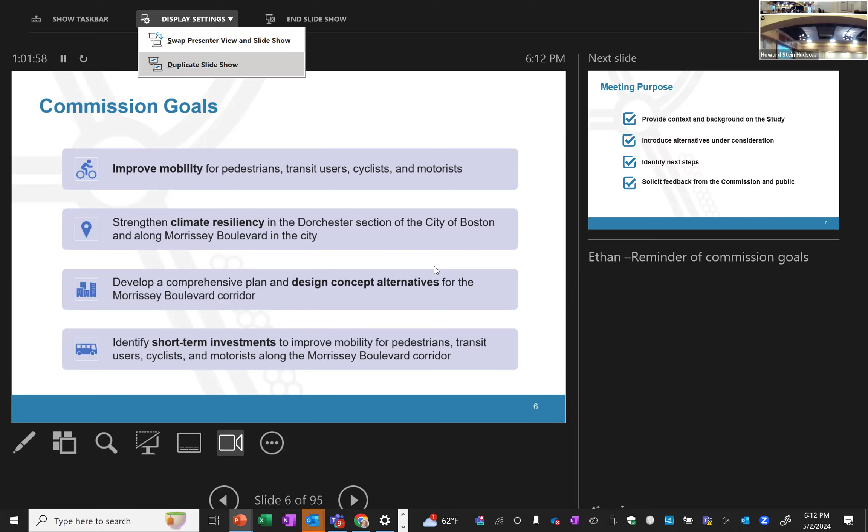Meeting purpose: we're here tonight to provide a little context and background of the study, and we're going to introduce alternatives for consideration. We want to show you our alternatives development to date, so we can hear feedback from the public as well as commission members. We're going to identify our next steps to the board commission meeting, and we want to solicit feedback from both commission members as well as the public. Just as a side note, there is a sign-in sheet outside the door if you would like to speak afterwards and ask questions. There's a microphone there in the center.

Bear with me on the presentation, it's slow. Deck advances. No, it's not.

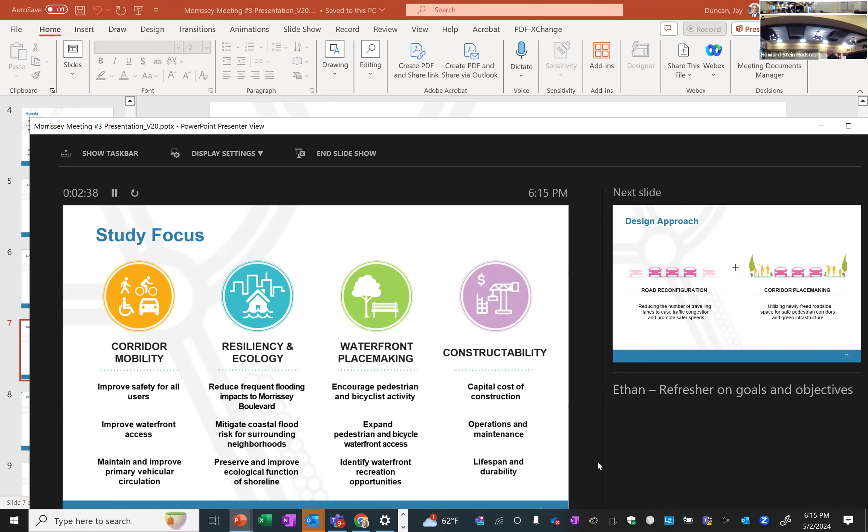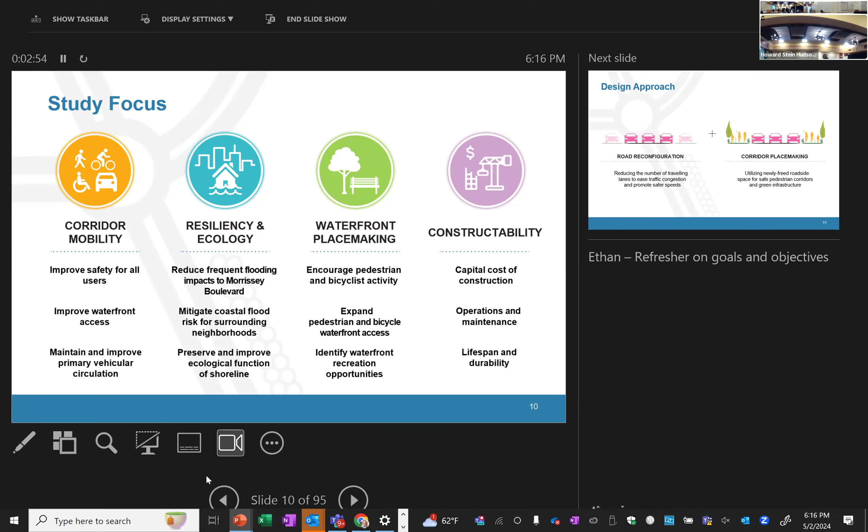Placemaking is not just about making the area resilient, but also a place to go to and to live in, with ability and constructability in mind. We don't want to propose things that can't be constructed, so we look at things like costing, operations and maintenance, as well as lifespan.

This slide focuses on our design approach. When you look at this graphic, it shows the current state on the left side with vehicles, and the right side with vehicles as well as other modes. That's what we're really trying to focus on, moving from what it looks like now to what it looks like on the right side.

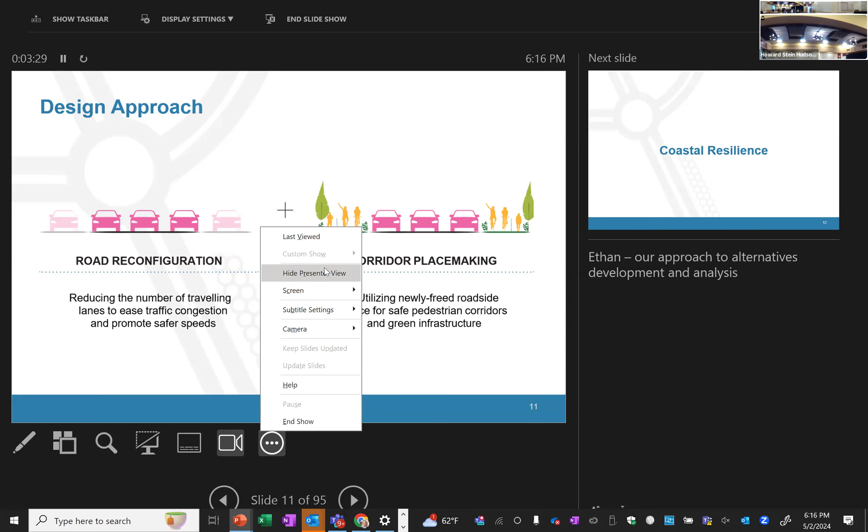In addition to our road reconfiguration, we are obviously focusing on coastal resilience. This is a slide we showed in the prior presentation, meant to illustrate the areas that are protected and the areas that are unprotected.

We've already covered this, so what I'll speak to is that the northern portion of our study area has a lot of protection, as does the southern area. It's the central zone that we're going to be focused on for climate resiliency.

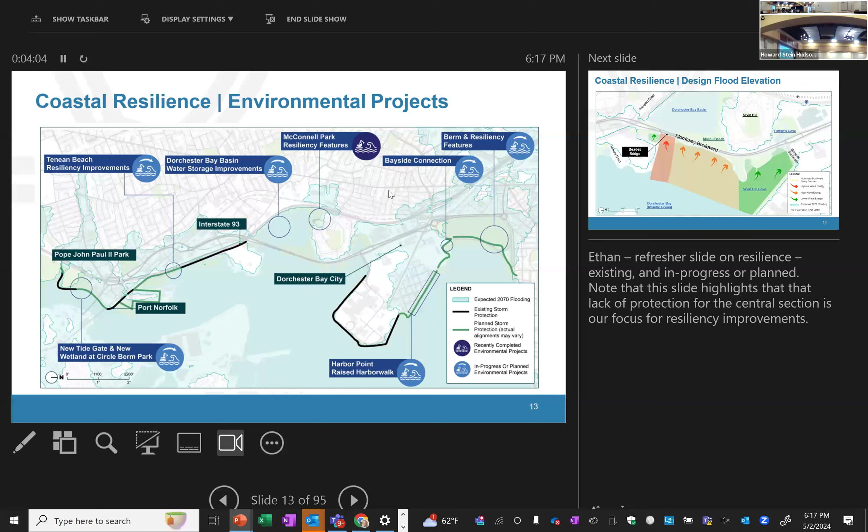This graphic illustrates a bit more wave action and introduces a term called design flood elevation—essentially what we'd have to bring the roadway, or areas that aren't roadway, up to for protection.

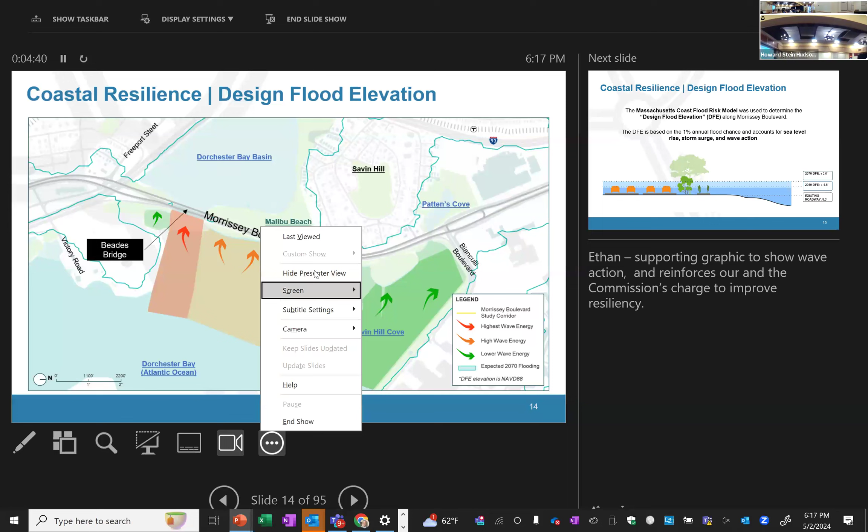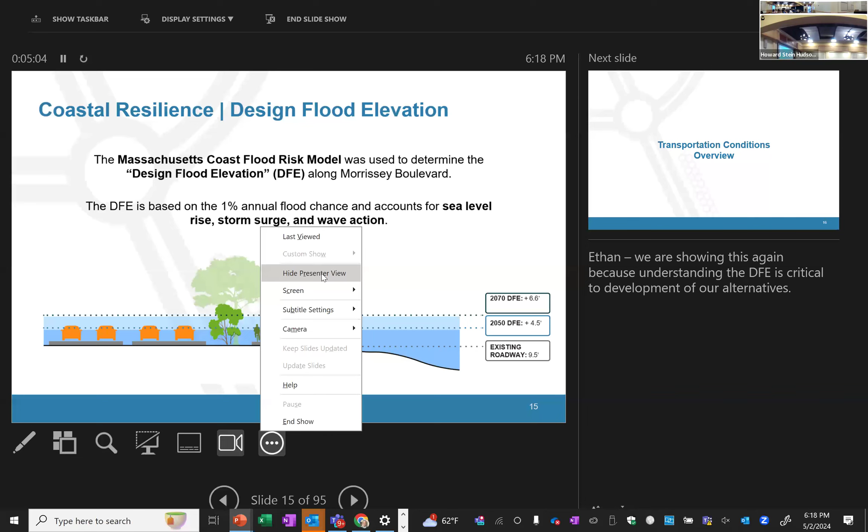This graphic is more of a side view of what the design flood elevation needs to be. We have our existing roadway and then the year 2050 design flood elevation. We showed this in a different way last time. Here we're showing our existing roadway at 9.5 feet, and we'd have to add 4.5 feet for 2050. For 2070, we'd have to go up another 6.6 feet above that. This illustrates what we'd have to raise the road area to in order to prevent flooding.

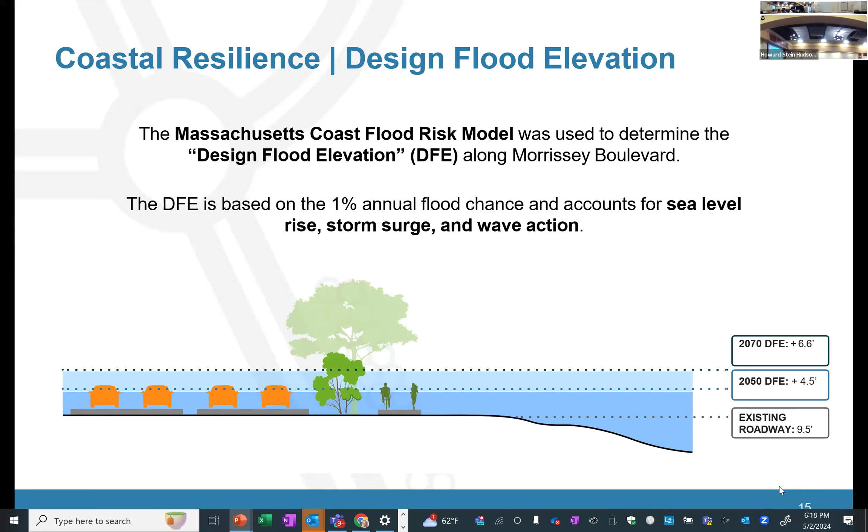So I'm going to turn it over to Casey, part of the team, who is going to go through much of the technical work. You've heard a lot from me the past couple of evenings, so I'm sure you'll be happy to hear from somebody else.

Good evening everyone, my name is Casey Harden. I'm a transportation engineer with AECOM, a consultant working on the project. I'm going to talk a little bit about some of the background on transportation conditions and explain how we set the footprint for what we're trying to do with specific alternatives.

I think a lot of you know from your route here that the traffic started. So we're going to start with traffic—I heard quite a few people muttering on their way in. I got stuck at all those red dots too, right?

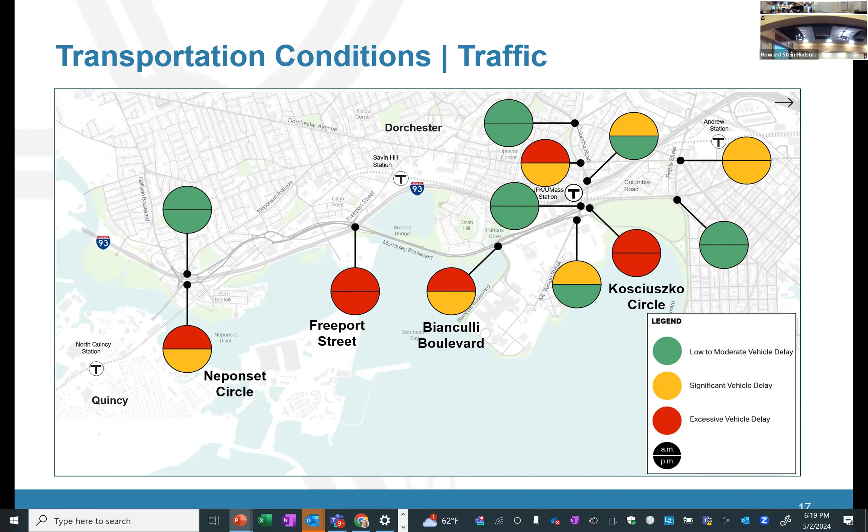The Morrissey corridor is really constrained by bottleneck intersections at K Circle, Freeport, and Bianculli Boulevard. The intersections themselves can't process the demand trying to get through there. So when you think about Morrissey as a 3 or 4 lane roadway, during the peak hour, for the most part those lanes are just storing parked cars that creep at 5 miles an hour from stop to stop. I wanted to set that as the backdrop, also thinking about the use of the corridor.

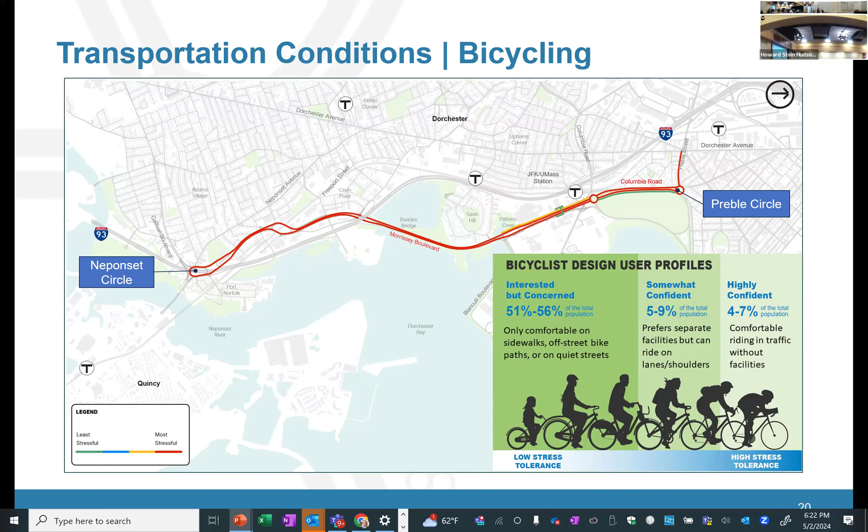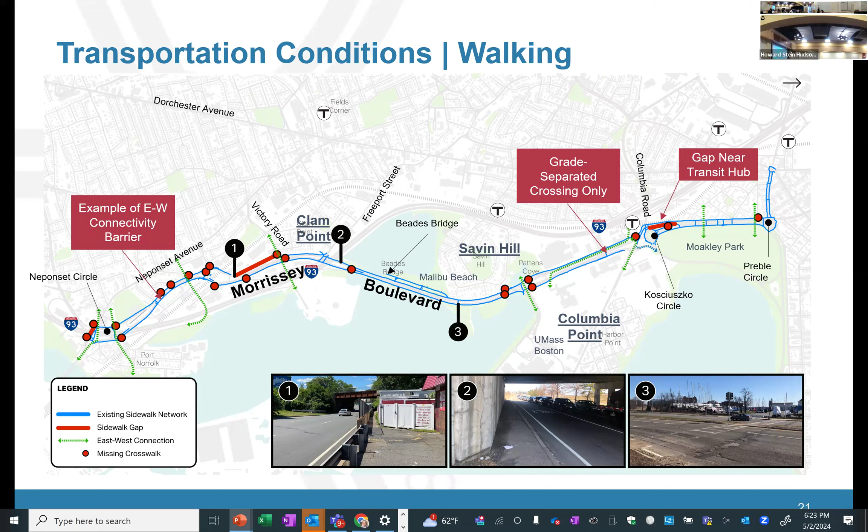With that kind of background for transportation, as even suggested on the climate resiliency side, we're going to go through the corridor and highlight some of the potential alternatives that we're looking at. We're about midway, three-quarters of the way through this commission process, so we can give you the opportunity to see them and give us some feedback, so that we can come back to the drawing board as we advance towards the final recommendation.

To go through this process, we're going to break the corridor up into three big chunks, starting in the north, where the focus is on reconfiguring the roadway facility, but also looking at placemaking and green infrastructure. The focus in that central section is very definitively on coastal resiliency, but also looking at how to better configure the roadway, and then back to more of a transportation focus in the southern part of the corridor.

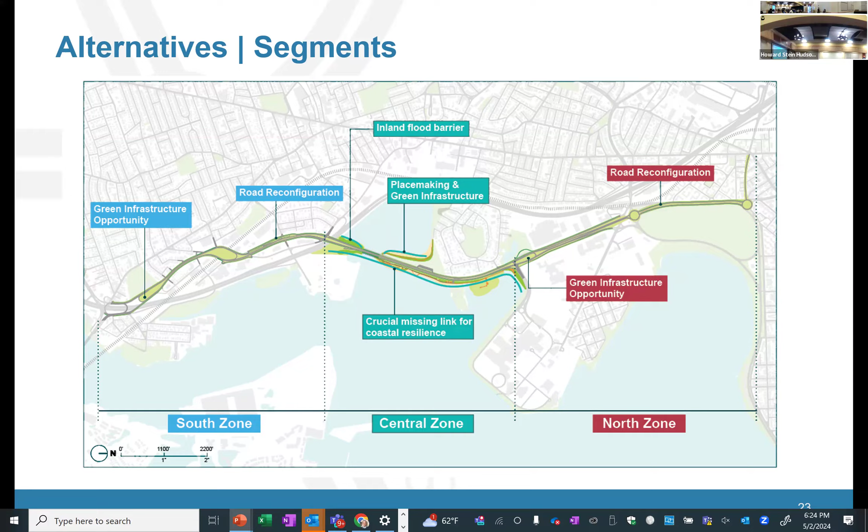Now, when you think about that and you're starting to get a little scared, I just want to remind you of that point at the beginning. When we think about the way traffic operations go poorly, it's because of these few intersections — there's too much trying to get through one spot. So I'm going to talk about, as we go through the corridor, how we're working on some engineering solutions to help those intersections work, despite allocating the space better to bicyclists.

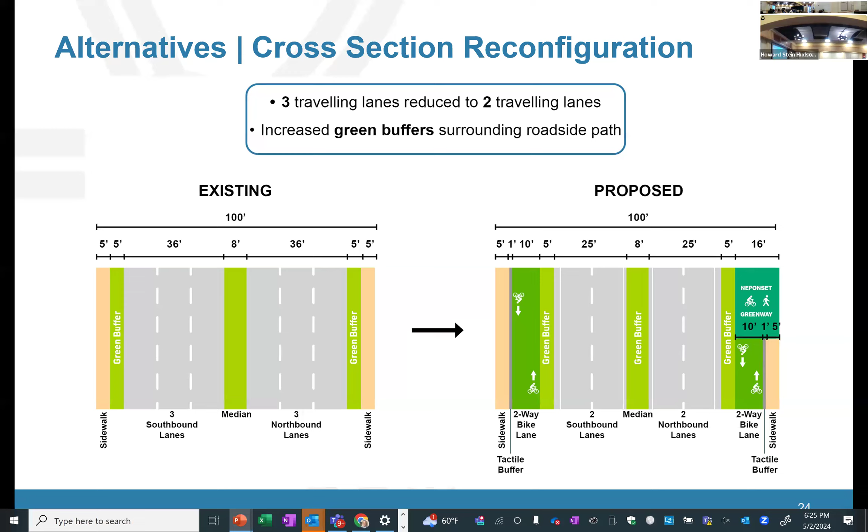To do that, we started with some traditional traffic control mechanisms — traffic signals, pretty basic, roundabouts, those are pretty standard. But we're also looking at some relatively progressive intersections that are all designed to remove turning vehicles or move them out of the way. That allows the intersection to focus on processing fewer movements. It can get more cars through while also consolidating the space to help manage speeds and find ways to redirect and relocate those movements. I'll show you as we go through the corridor how that would work.

As we focus on the northern part of the corridor, we've looked at a couple different ways we might reconfigure Preble Circle. On that first diagram with the safety drawing, we noted Preble Circle is one of those locations flagged as a high crash location. It's very confusing, although some recent striping improvements have gone a good way to better delineate traffic.

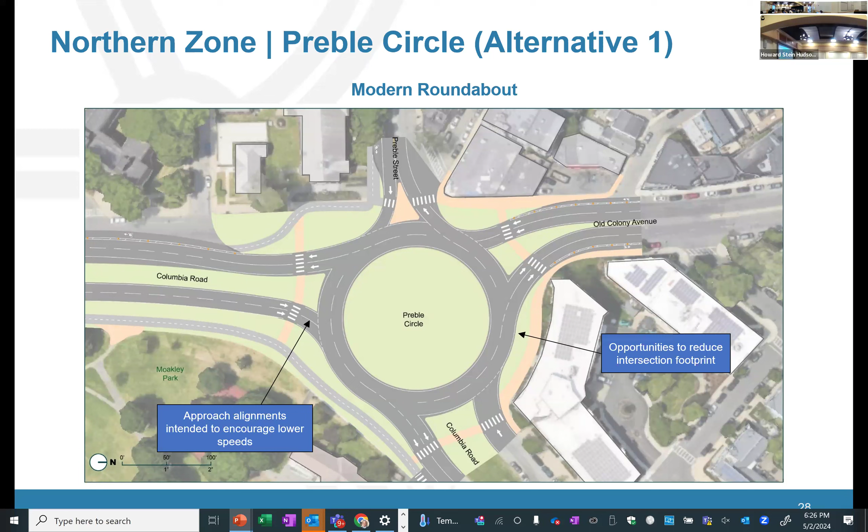The other option would actually look at creating a traditional traffic signal. That would be a big change. We're accounting for the fact that it could potentially process traffic, but also understanding it would be a big change that needs to be vetted. It would likely have wider approaches than the roundabout, but we're still working through that traffic analysis, and by our next and final meeting we'll share results on which of these performs better.

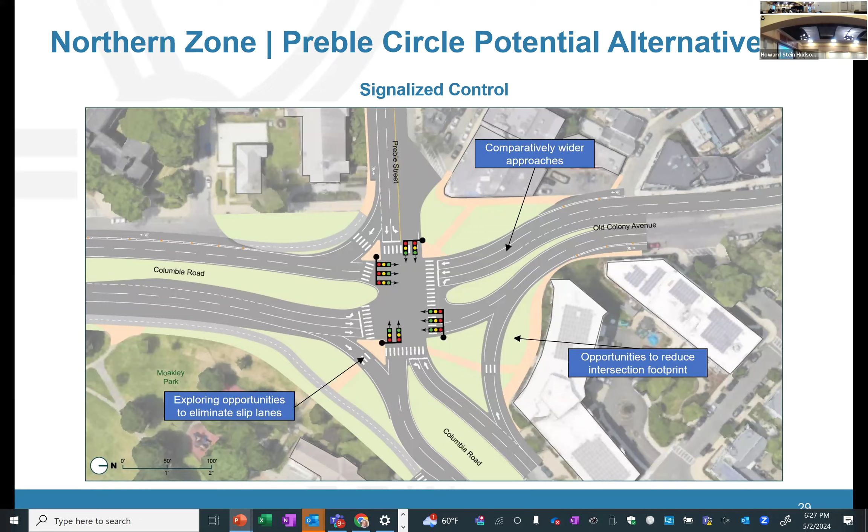As we move further south along Columbia Road to K Circle, we focus on potential east-west connectivity. Right now there are several at-grade pedestrian crossings, and there's also a pedestrian bridge. From an urban design perspective, the latest practice is to encourage that activity in the street, because when you limit crossings purely to up and over, it creates this divide: this is for the cars, this is for the people.

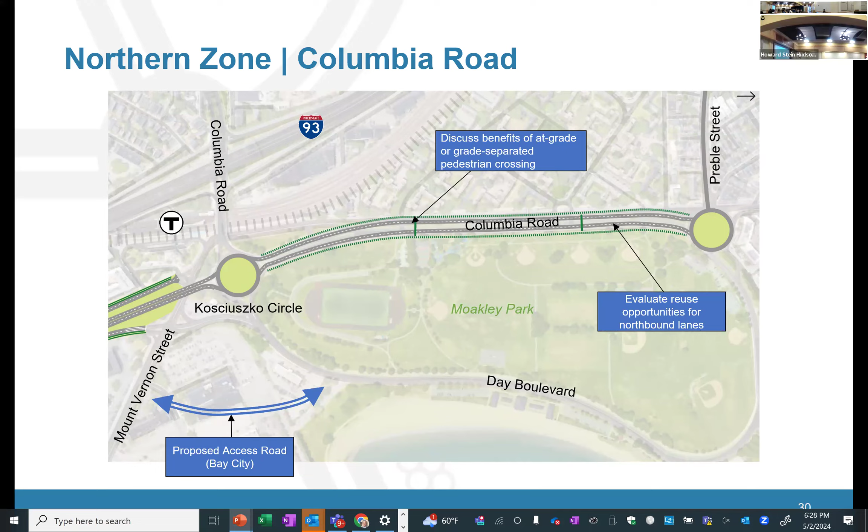Looking north now, up towards Preble Circle and downtown in the distance, with Moakley Park to our right, one initial alternative we've looked at is simply reconfiguring the crosswalks at the local road intersections, and converting the bicycle lane—currently on the road side of the parking—into a parking-protected bike lane, putting it off on the right side of where the cars are.

We have a second alternative that takes us even a step further. This looks at potentially removing the median and providing bus lanes. We've collaborated with our friends at the city, and through their work, thinking about how, with significant developments coming in from the point, we want to ensure multimodal access—potentially having a dedicated bus facility on this segment could help facilitate that.

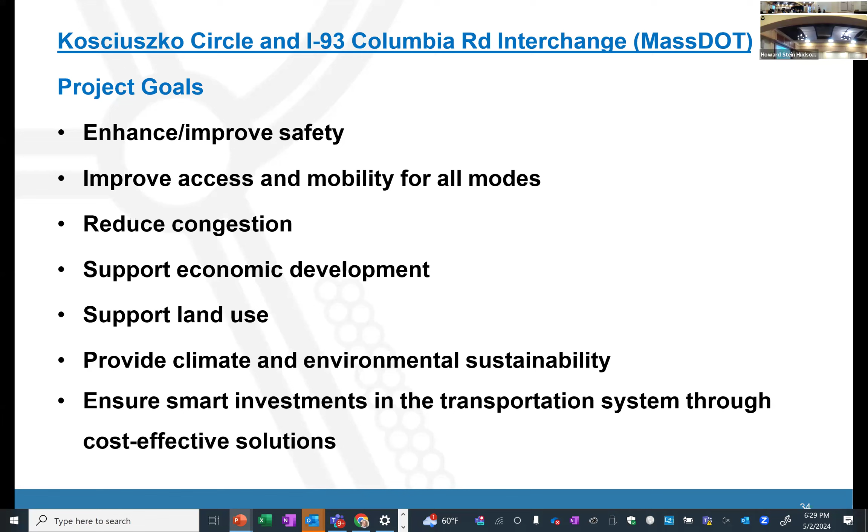Now, as we get towards the Kosciuszko Circle intersection, we need to explain there's a separate project broken out for Kosciuszko Circle and the I-93 Columbia Road interchange. That project is advancing on its own through coordination with us. It has a lot of the same goals and objectives, aimed at reducing congestion and improving safety. Looking at the study area, it comes right in between the segment we were just discussing, but also looks at where Columbia Road bends around—these are the interchange ramps.

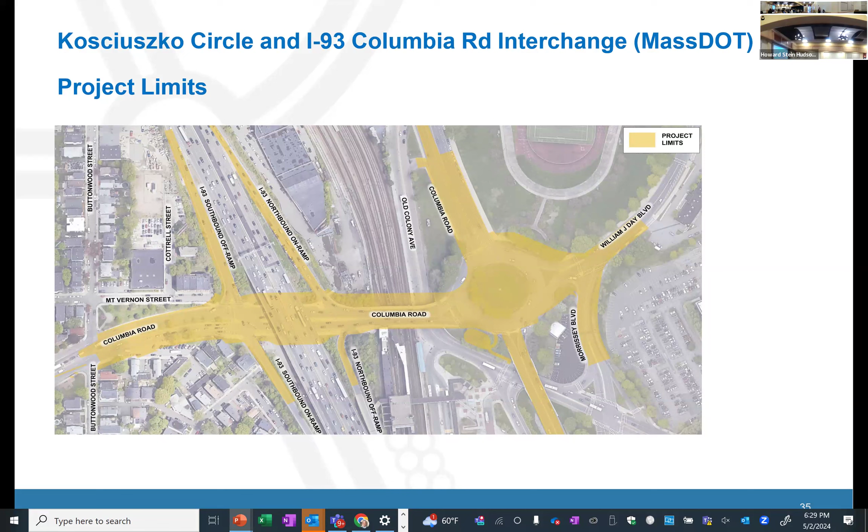It's a very early stage. They're still working on their scoping and planning out their public engagement process. I think the key point here is they're going to be looking at a variety of different options with a design year of 2045, which lines up with our future year traffic analysis.

So what—the design year? That's when we project the traffic out to a future year to analyze what the road traffic volumes could be.

So this is new? This project has actually been presented about 10 to 13 years ago, with lots of meetings from the community, going through Kosciuszko Circle all the way down. All of this has been presented with all these different ebbs and flows with the growth of the company. How does your presentation compare to what the city has already spent lots of money teaching us all this? This is not new to the community at all, and now we have 10 years of data of traffic and flow from that. So what is the difference? Because this is the exact same thing, except more basic than where we progressed to 10 years ago—on the exact same stretch, minus the environmental planning portion.

So please don't waste our time, let's talk about the differences and what's evolved in the last 10 years from the exact same thing. These plans were presented to us almost 15 years ago. Maybe someone from the city could address that lack of progress, because that's a waste of our money and time, discussing the exact same thing. I can show you my notes, but I'm sure you have them since they've been documented. Sorry for my frustration.

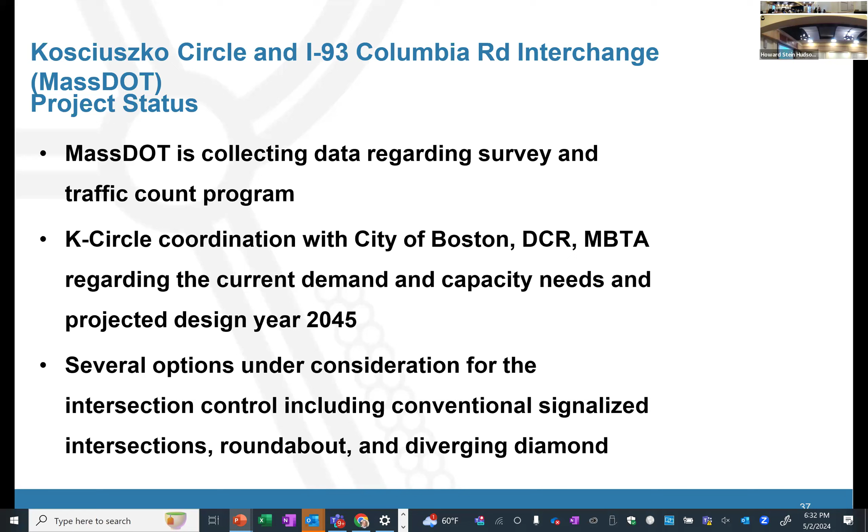Hold on for a second, can we just get through the presentation so we can address everyone's questions at the same time? I want to make sure we're not getting ahead of ourselves. You might find your questions answered as we go through this. I understand your frustration, but we also want to make sure those who weren't here during previous meetings have the opportunity to access the same information. So if we could just hold off until you finish this. Thank you, I appreciate it.

Thank you. For that specific project, the K Circle Columbia Road interchange, MassDOT plans on targeting late 2024 with some additional specific public outreach.

If we look further south and focus on this segment right outside us here at BC High, we're looking at whether there's really a need for those service roads. They take up a lot of space, continue to facilitate high-speed mobility, and impede the corridor from being a good access point to the station.

We're also looking at something thought up in the Columbia Point Master Plan many years ago: putting a signalized intersection in the middle of the block between K Circle and Bianculli.

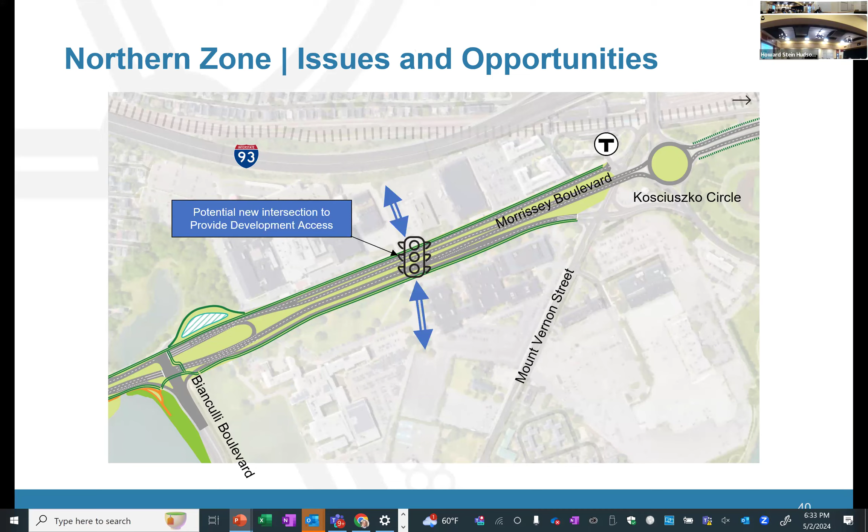We're now looking south towards Bianculli, from here to the left. The first option is a relatively simple reduction in the number of lanes, providing for bicyclist and pedestrian facilities. The second alternative provides a signalized intersection and brings all four roadways together. The final alternative doesn't have that signalized intersection, but eliminates the frontage roads—you can see how that creates additional opportunity for green space.

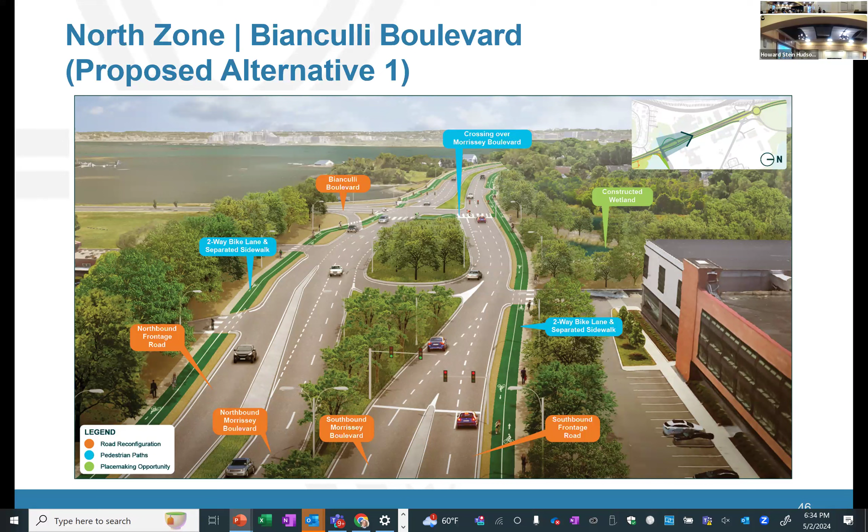At Bianculli itself, we've looked at two potential innovative intersections. The first is called a continuous green T. This works by allowing one movement, the southbound movement, to flow green at all times. That creates a really efficient intersection because it never has to stop those cars, and it allows us to neck the intersection down to facilitate smaller crossing distances—we like that from this perspective.

The other alternative we're looking at for Bianculli is called a partial median turn. Instead of drivers today swooping off to the right to make their left into Bianculli, they would continue straight and utilize a new intersection down here to turn left, then make their right. The theory is we're moving some of those turning movements out of the intersection—either allowing throughs to go all the time without stopping them, or moving lefts out of the intersection altogether. That lets us consolidate and help the intersection operate, and the cross sections illustrate that reduction in size.

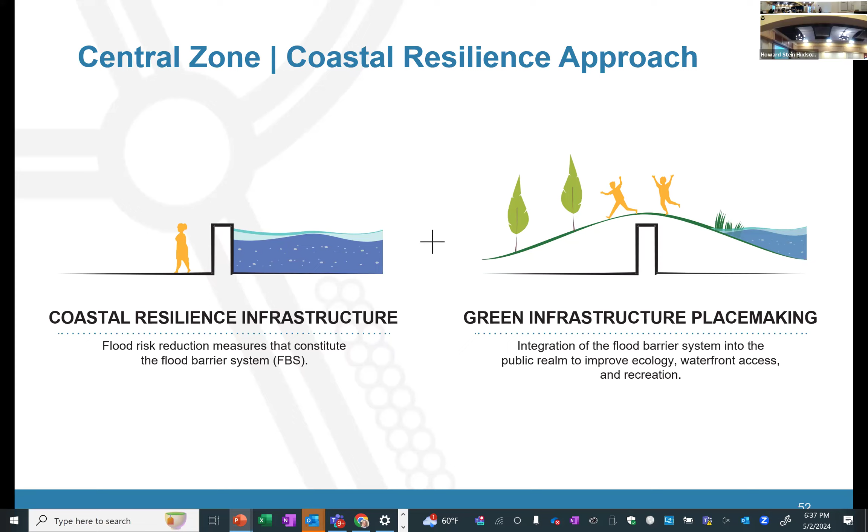But how do we do that? We don't do these things the way we used to back in the 60s and 50s, where the Army Corps of Engineers would just come in, install walls, and prevent floodwaters from coming in. The investments we're conceptualizing leverage green infrastructure and placemaking while introducing these flood protection mechanisms. The diagram on the left shows it raw, which is something we will not be doing. What we'll be doing is combining the road infrastructure with placemaking opportunities, and I'll show you what they might look like.

Generally speaking, Casey was telling us everything happening in the north, and he'll tell you more about what's happening in the south. This is about the central area, where we believe there's the most opportunity for pedestrians and placemaking to occur. Now, I don't want to dismiss the north and south with respect to placemaking opportunities.

Everywhere we can, in every alternative we study, we're introducing green infrastructure, pedestrian mobility, bicycle connectivity, and rights of way that allow families to walk along the water safely, connecting you from the north to the south.

But when you get to the center, you get this amazing view to the harbor, to Dorchester Bay. There's an accessible waterfront that I think is an incredible opportunity for gatherings. That's what's shown in this diagram.

If you squint because of the scale of the project, you can actually see right through the center—there are a lot of green areas for programming opportunity. What we do with that is basically imagine the road being raised, and on the side facing the water, a berm-like structure that introduces a boardwalk, places for people to hang out, chill, find shade, and a lot of opportunities for ecological and habitat restoration. We'll show you what that means in the next slide.

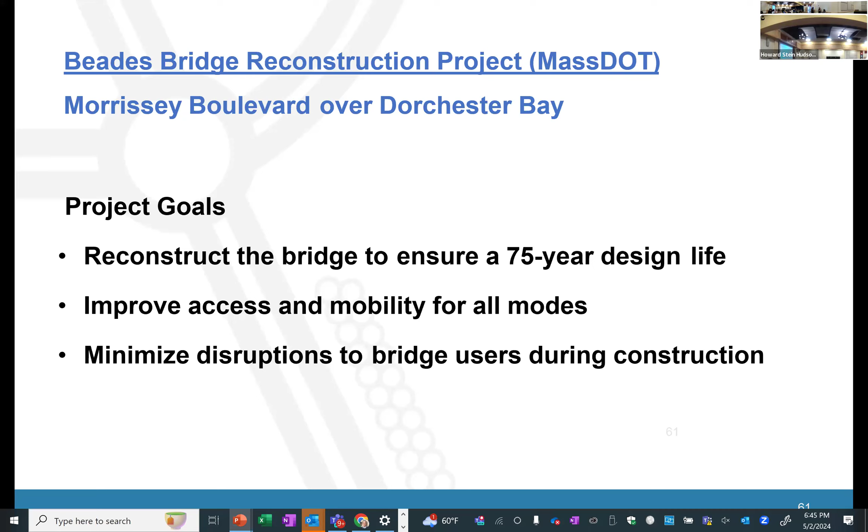Back again to talk a little bit about the Beades Bridge project, which is a second breakout project that MassDOT has initiated to advance the replacement of the Beades Bridge. Everyone knows it's been here for a very long time, has many issues, and usually gets stuck open. So the new design will ensure service life for the next 75 years. Again, the Beades is just that short, simple span across the navigation channel to the cove.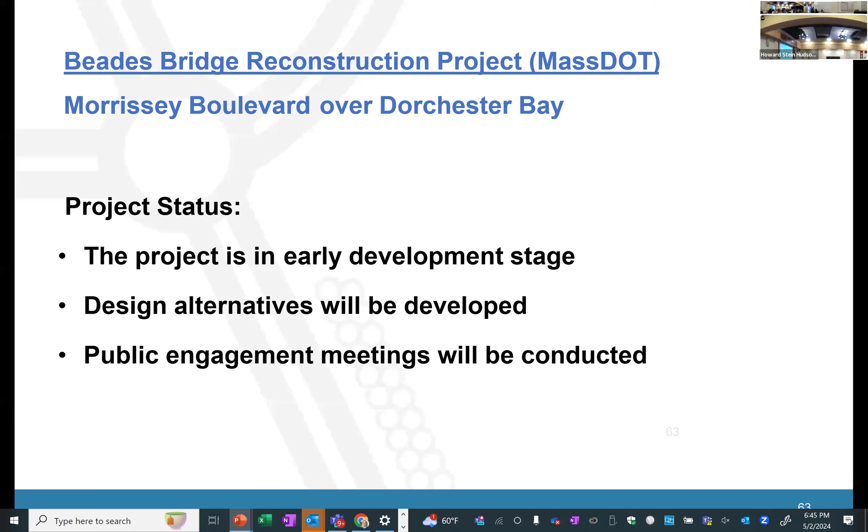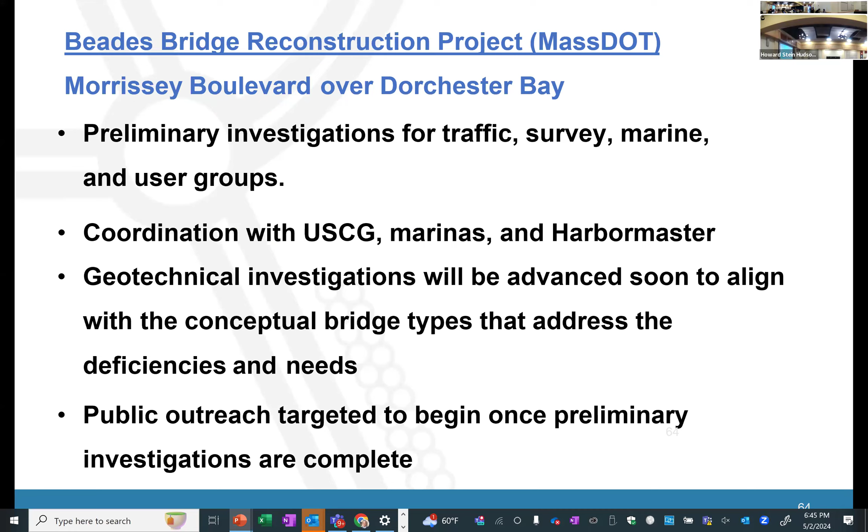Very early in development, similar to the case for Morrissey Boulevard project, continuing coordination. The main point of getting this on its own track is that all those initial phases of a bridge project are a little different from a road or flood control project. They include geotechnical work, a variety of structure type analyses that they're initiating, and they'll be conducting specific public outreach for that.

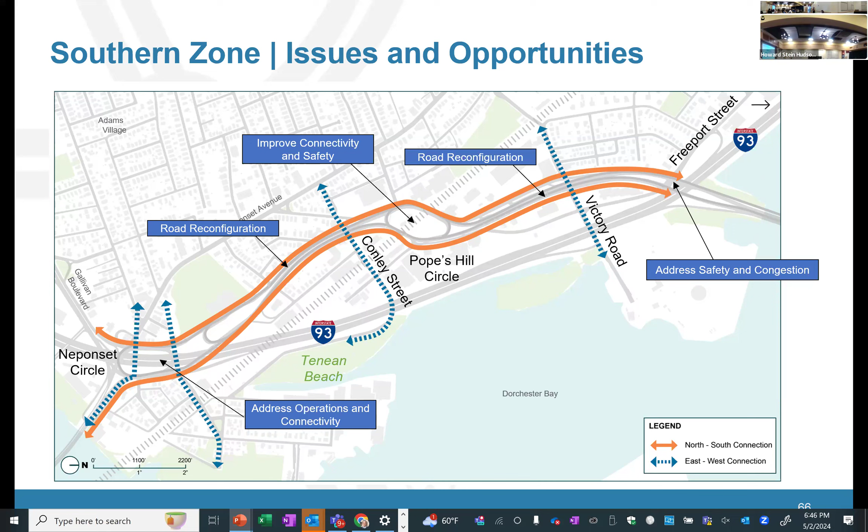As we get past the Beades towards Freeport, we enter the southern zone. Just past underneath I-93, we have some of the same types of challenges: congestion, safety issues at Freeport, important east-west connections at Victory and down Conley Street, and safety issues at Pope's Hill and Neponset, particularly for folks trying to get through there in the mornings.

Starting at Freeport, we have two potential ideas to reconfigure the intersection in a meaningful way. In this configuration, we would pull all left turning vehicles out of the intersection. You wouldn't make a northbound or southbound left directly; instead you would come through and make a U-turn to get going, with the same type of movement for your southbound left turn.

The idea is that by pulling those movements out of the intersection, we can create efficiencies that reduce the footprint, which helps with speed off peak so people aren't driving through there at 50, and also helps the intersection process the traffic and demand more efficiently.

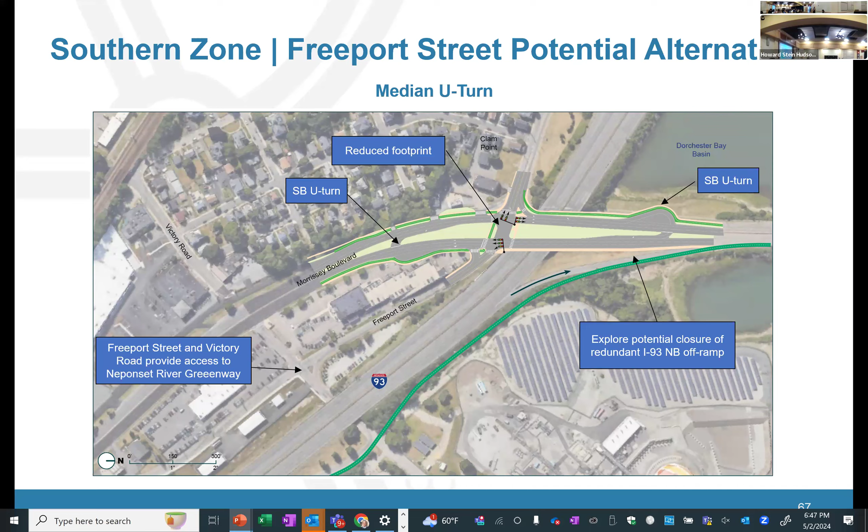The second idea at Freeport is called a quadrant roadway. This is a pretty unique application, but generally a quadrant roadway builds a little connector across one leg of the intersection. In this case, we would use that to eliminate northbound lefts. So instead of making a northbound left off Morrissey, you would make your right, down and up Victory Road. That would again pull those left turns out of the intersection and allow us to create more efficiencies for the traffic signal. We're continuing to evaluate all of these and are interested in your feedback.

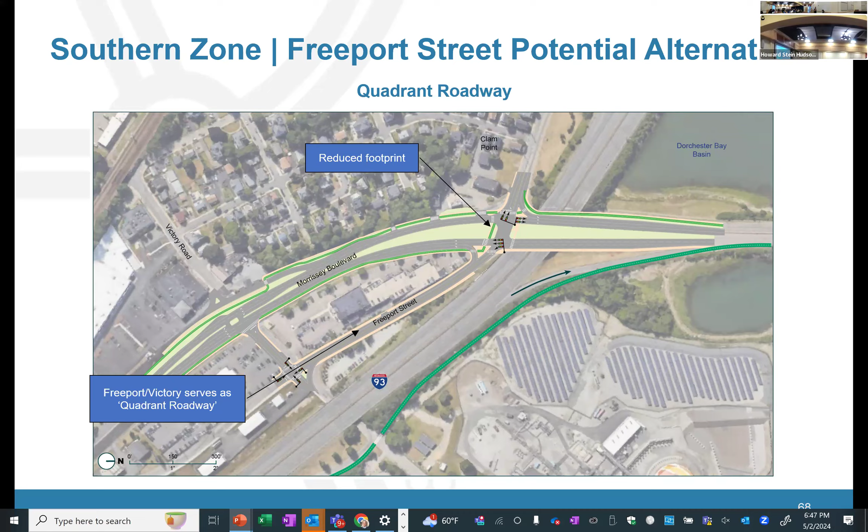Continuing south, we're again looking at that service road system in and around Victory Road. The need for that creates an additional crossing for pedestrians heading west, although it does have some access management benefits. Most importantly, at the northern part we need to ensure connectivity with the Neponset River Greenway.

Excited to see some of the construction progress, and recognizing there's going to be a big group from the community that wants to get from the neighborhood to the Greenway, but recognizing the ramp system, it may be more likely that we facilitate that along Freeport and Victory Road. So we're taking a closer look at that northbound off-ramp, and whether it's really fully needed in the scheme of traffic, although it's a pretty big task to get one of those.

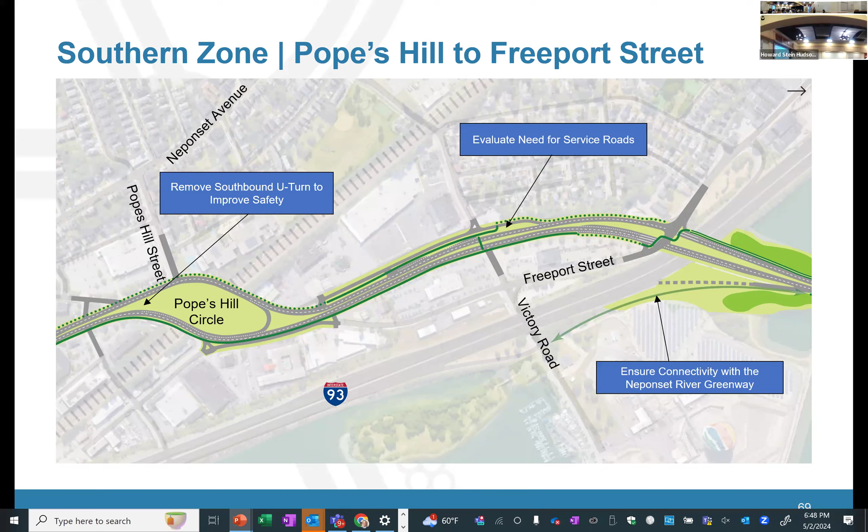For our southern road section, from Pope's Hill Circle down to Neponset Circle, we want to flag that we're looking at this southbound U-turn at Pope's Hill Circle. That's where a lot of people are coming into the neighborhood, and I know you've all done it many times, making that jog all the way over to make the U-turn - you can see a lot of crashes as a result. We're not sure that's the best idea from a safety perspective, so we've been looking to close that and route traffic down to the next southbound U-turn just before the one.

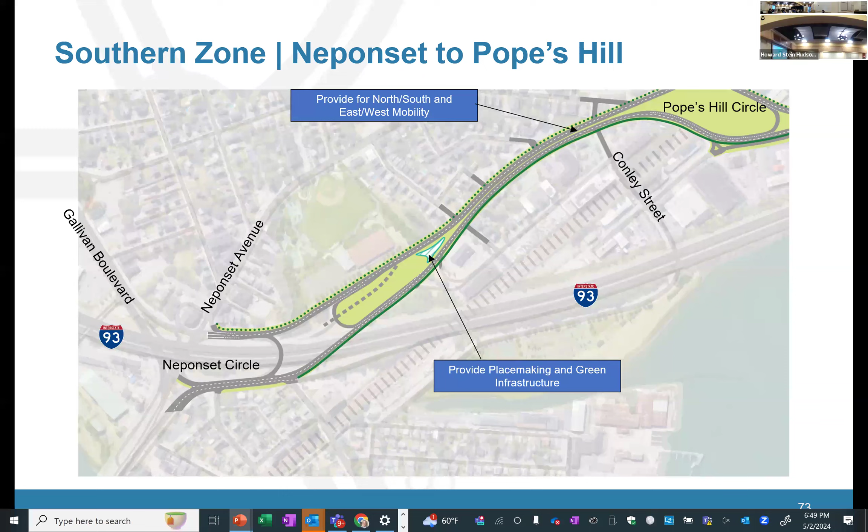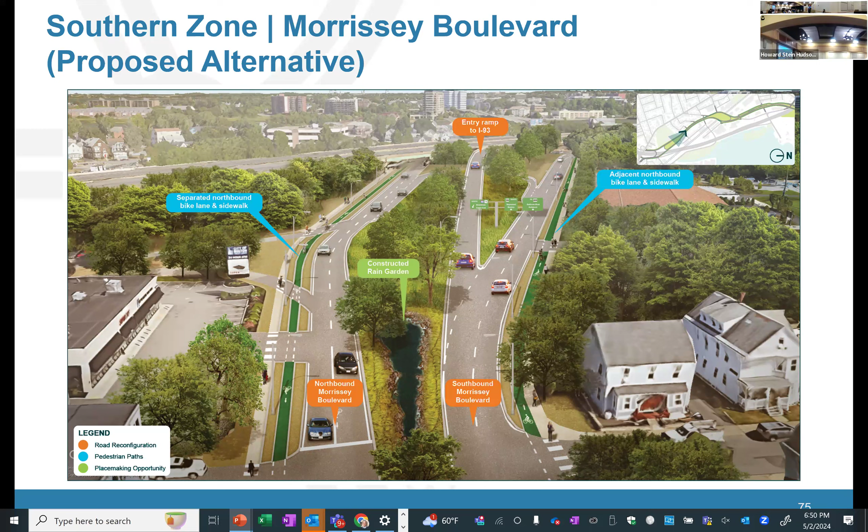We do see a nice opportunity in some of these medians. This rendering shows a typical application of how we might apply stormwater green infrastructure to some of these median areas. We were talking earlier with Boston Water and Sewer, recognizing the challenges they have draining the neighborhoods after heavy rain events - there's simply a problem getting all the water out of the city. So the more places we can find to hold and store water within and around the corridor, the better. Identifying places like this means that in heavy rainfall events they would essentially serve as a mini holding pond while the rest of the system does its work getting the water out of the city.

The last major bottleneck intersection to talk about is Neponset Circle. Just to orient everyone, north is to the left. Here's Neponset Avenue, here's the bridge - Neponset Avenue goes straight through, and Gallivan Boulevard is down here. This is the whole Neponset Circle with I-93 towering over it.

We decided we really wanted to take a hard look at this segment. This is where you folks who are going north end up stuck trying to get up, and the off-ramps back up all the way down, and you're just trying to keep going straight. Yeah, you get stuck and try to get all the way to the left and hook around.

So our idea here is to convert this segment to two-way. Today it's only one way this way. By allowing the Neponset Avenue northbound traffic to go straight through, we're taking a lot of pressure off this leg, which already is dealing with, especially in the morning peak, all these people trying to get on the northbound. So the idea is by opening that one leg up bi-directionally, people who are just going straight through, or even coming from Gallivan Boulevard, can just turn left and go that way instead of cycling all the way around in this mess of a weaving.

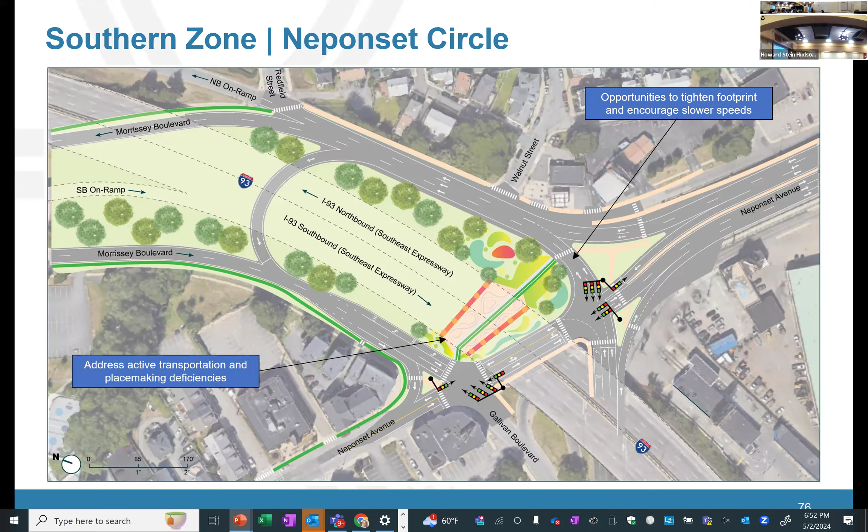Here in Neponset, within the roadway reconfiguration, we're also looking for opportunities to create better east-west connectivity. We recognize it's a pretty intimidating environment with the hulking overpasses and somewhat limited pedestrian accommodation. So we've looked at creating something like a pocket park. A lot of municipalities have successfully activated this type of space in and around overpasses, the combination of lighting, infrastructure, and nice, wide, comfortable pedestrian amenities can help create that activity that we're not seeing today.

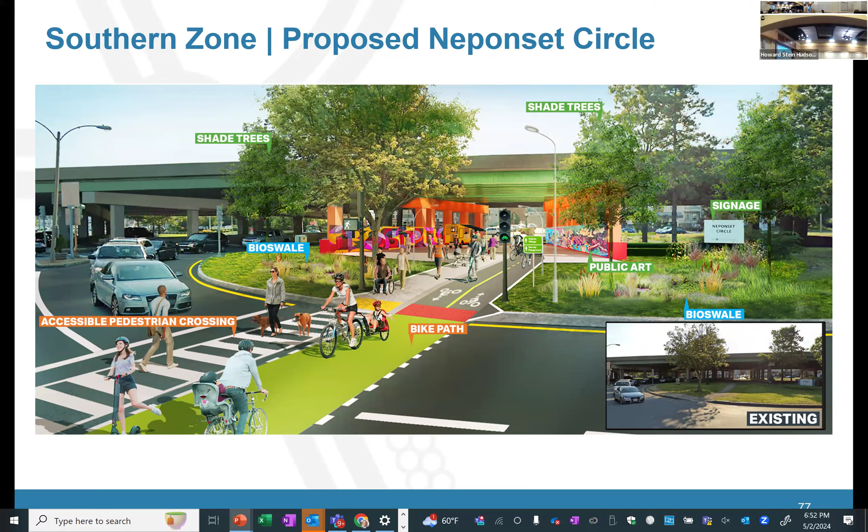So to wrap up the presentation, Ethan's going to talk a little bit about how we're going to use the evaluation criteria we developed to evaluate the alternatives.

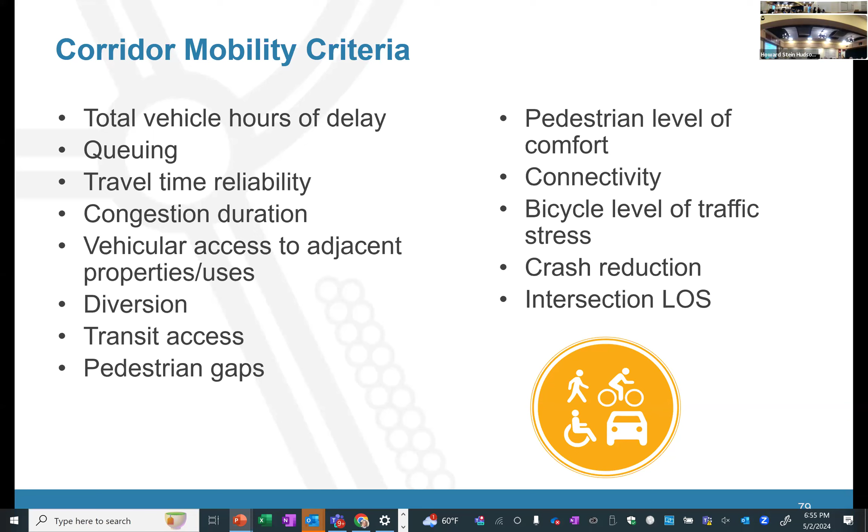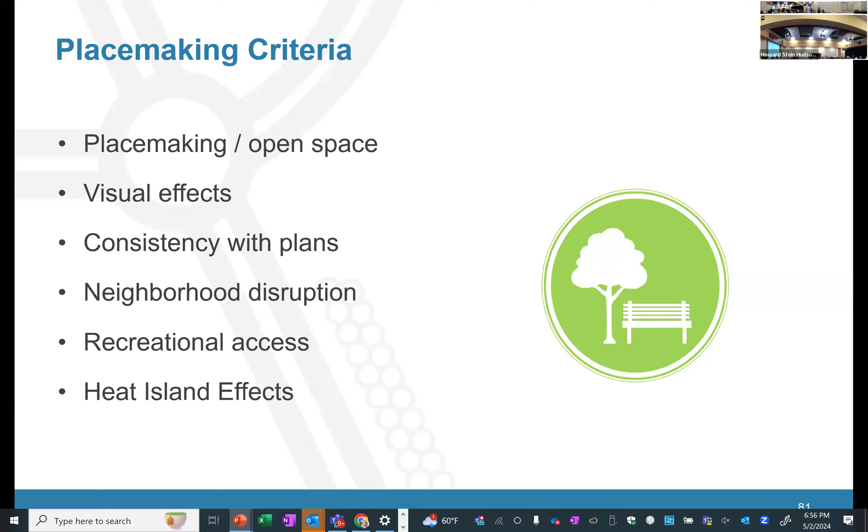Constructability is something I noted earlier, but we have to be aware of what construction costs would be. It's much more about thinking from a permitting standpoint - can it actually be done? Some people use feasibility to mean can you construct it or not, but oftentimes it's not about throwing money at it. Sometimes the permitting process just doesn't allow certain things, so we look at that very closely, because ultimately if it's not permittable, it's not constructible.

We also have to look at what kind of future maintenance there might be. We want to implement cost-effective solutions to minimize future maintenance costs, and permitting complexity is tied to constructibility.

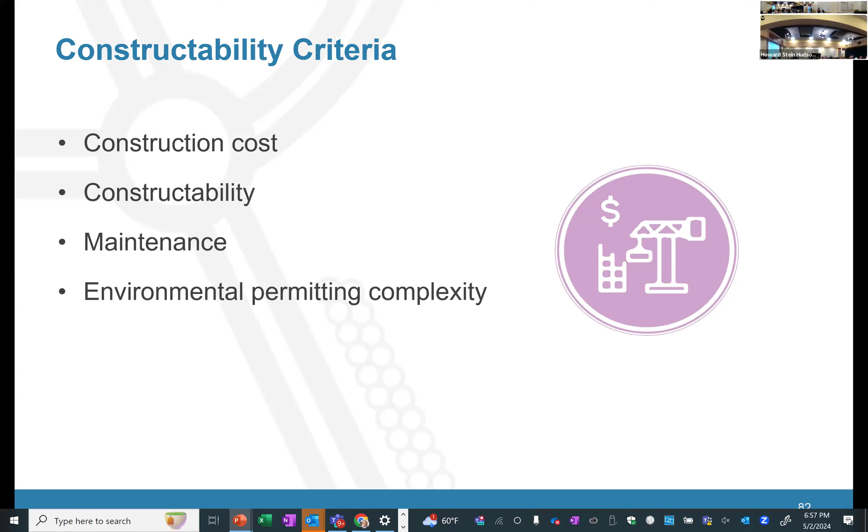With that said, I'm going to turn it over briefly to Rob Lowell from DCR, who's going to talk about some of the short-term corridor improvements. Thank you, Ethan. I'm Robert Lowell, Deputy Chief Design Engineering at the Department of Conservation and Recreation. I wanted to identify some of our short-term improvements at the Freeport Street intersection.

Improvements were completed in fall of 2023 that included safer pedestrian crossings with new signal actuators, larger bicycle and pedestrian mid-crossing refuges, and ADA accessible ramps at all the crossing points. An additional left turn lane was also added from Freeport Street to enable two-lane movement from Freeport eastbound onto Morrissey, and that was done last fall.

This spring, DCR will resurface the inner access road from Old Colony to Bianculli Boulevard and reconstruct the sidewalks along the west side, the Star Market side of Morrissey. The inner access roads from Bianculli Boulevard to Mount Vernon Street were done last fall.

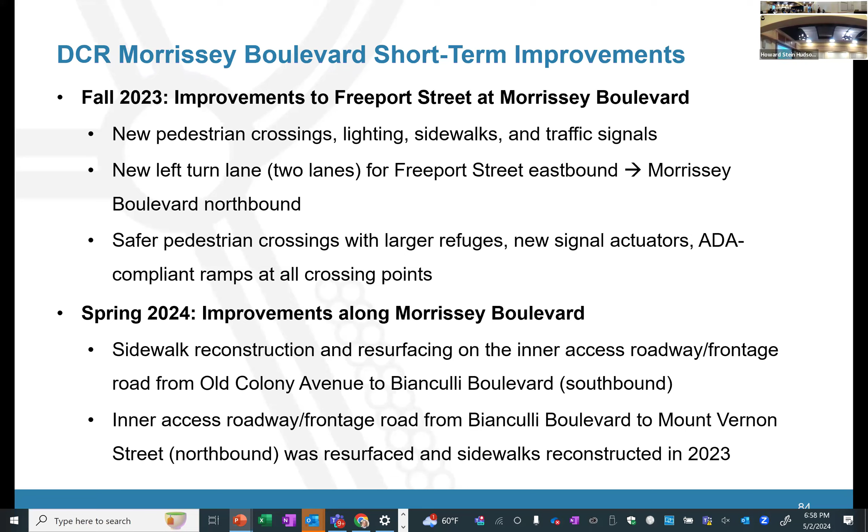Those are our roadway improvements. I also wanted to note that the Morrissey Boulevard pump station design - DCR is working on a pump station to address flooding that occurs near Conley Street and along the corridor. This started in 2019, and we're now getting to actual construction.

Presently, DCR deploys portable pumps to address nuisance flooding along Morrissey Boulevard. However, the new pump station will operate automatically and remove stormwater from Morrissey Boulevard, and also improve drainage between Conley Street and McKone Street, all the way down to Marketplace on Morrissey Boulevard. That's the catchment area that will be affected.

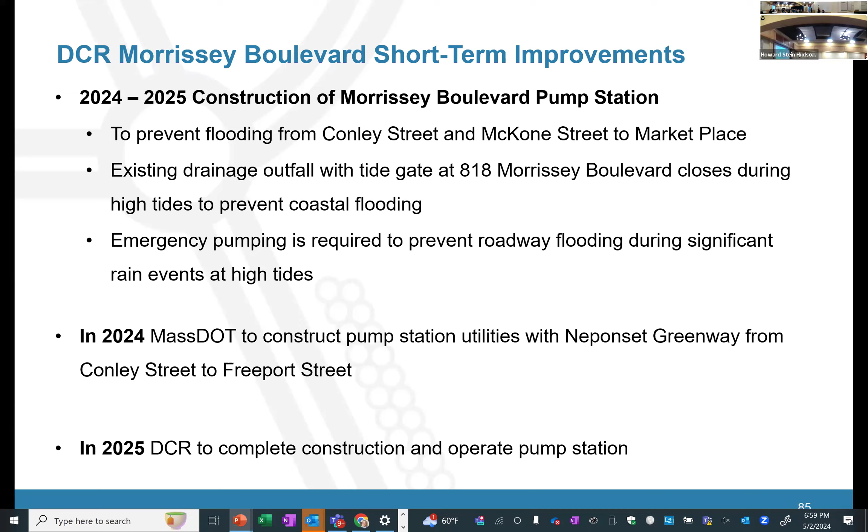MassDOT is currently constructing the pump station utility corridor for DCR that's coincident with the Neponset Greenway Trail. Once that's done, DCR will complete construction of the pump station next year and put it in operation. That's the summary of the short term. Thank you, Rob.

Getting into next steps before we open it up - this being the third meeting, we're heavily into alternatives development and preliminary alternatives analysis. What we've shown you has been through a preliminary screening at the study team level, but you can't fully bake the analysis until we hear from the public.

Alternatives development in process is to go out and solicit feedback. Our next step is to dive more deeply into analysis after we've heard from the public and commission members, and ultimately we have one meeting left to present alternative analysis. We'll have some preliminary design, some concept design, as part of the final commission meeting, and the product we do is a study report, which is underway as we speak.

This is all on the way, as you see on the bottom, public engagement - that's why we're out here today, and why for pre-commission meetings we want to hear from everybody. Last commission meeting we listened to what people said, and so we want to come back - the City of Boston, our partners, are looking to potentially do some extra public outreach between this commission meeting and the next.

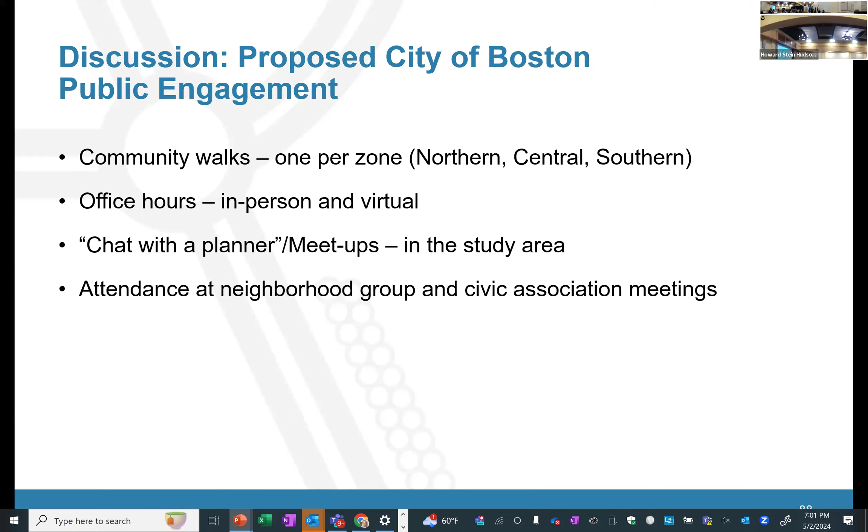With that said, it's now time to open it up to the commission members, so I'll turn it over to the secretary if she'd like to say anything.

Sure, for any questions or comments? Could you folks identify yourselves? Yes, sorry, thank you so much. It's not loud tonight, we're having difficulty projecting. Thank you. All right, we'll go ahead and start on that end.

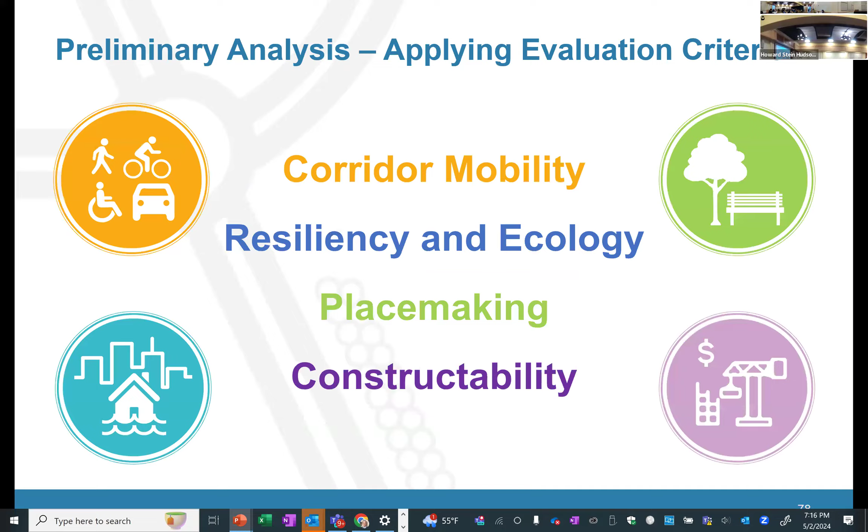So when it comes to the extension, maybe I'm a little bit confused, because what does the fourth meeting bring us? Are we making recommendations, talking about raising roads and different things happening, but we haven't really flushed out if we need to raise the road by 6 feet. I don't feel totally comfortable about the discussions that should be around things like, if we need to dredge certain places, what does dredging do for us if we're looking at Savin Hill Cove, Patten's Cove, Malibu - if we had a real plan of dredging, what does that do?

Does that help us? Do we still need the roads to go up 6 feet? Because again, my concern is the fact that the neighborhoods we live in, coming from Crescent Ave, we've got 8 train tracks and then the highway and Morrissey Boulevard and everything else. There's no talk yet of how that neighborhood gets over there, and we're adding more walls.

So the wall concerns me, even though we're gaining a lot in the sense of these pedestrian plazas and bike lanes and things like that. But maybe my question is, what do we... extending the commission the way that the rep had discussed, which I love, I think it needs to maybe become a working group or something like that.

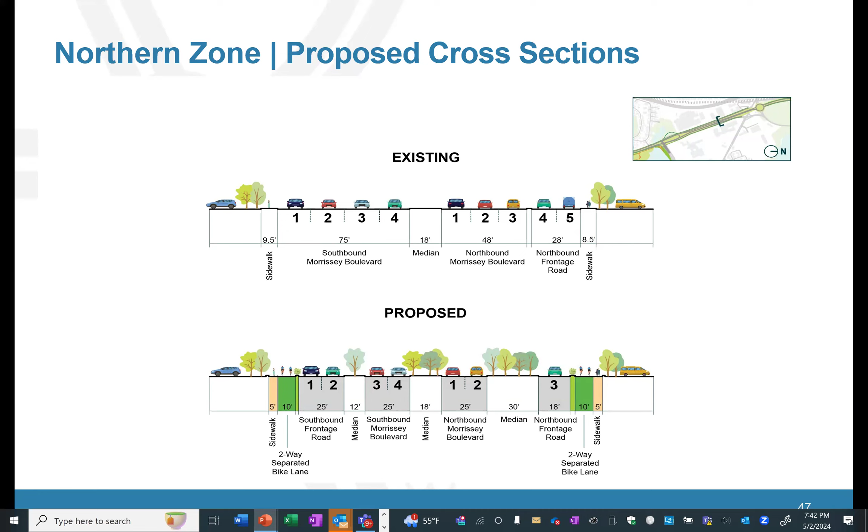One thing that I noticed on that Moakley Park drawing, I don't know if you can put that up there, but you have all this green space and you've got this bike path. Well, there's people that are going to Moakley Park, so I don't know if anybody plays any sports, but I do, BSSC, and there's no parking there. If you just put in bike lanes and there are no spaces to park at the park—there's literally the one section that you showed right there, that's like 15 spaces, and there's multiple people that play soccer—so I don't know if you're adding just those spaces. Put the bike lane on the other side of the park so the bike lane isn't between the road and the parking spaces.

Yeah, it's not the most detailed rendering, but the intent is not to limit parking. So you're keeping the parking, the intent is just to make it a parking-protected bike lane, so that you don't get doored by the driver's side door. You're on the other side of the parking lot.

These are parked cars, that's the parking, and the bike lane just gets moved to that side. I just wanted to ask because there's not enough parking as it is to participate in any activities. It'd be great if they had a little more parking over there by Moakley, but that's probably a separate initiative. A lot of people go to use the park, and they don't all drive, they do walk there, but not as many as you think. For all those clubs and initiatives, they're coming from other towns into the area, they're not all local, that's just the reality.

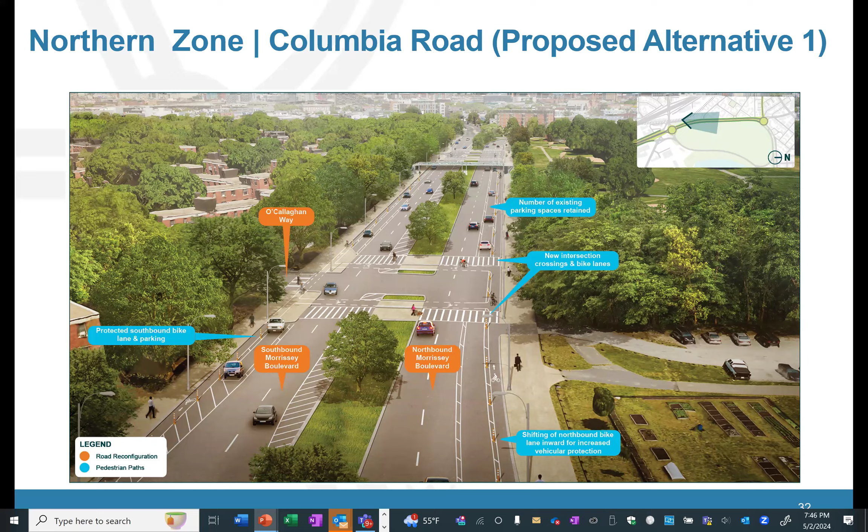I probably have some other things, like Don Walsh was bringing up, which were great points. There are so many things in those renderings I have questions about, like the turns, right in front of the Boston Globe. Yeah, where you said the left-hand lane, we'd have all the traffic go past and then do a turn to get into, I think it was UMass, is that correct? Yeah, this one here - so if you're going southbound, today you'd be way over on the right on the frontage road, and you'd be in that left turn here. Instead you would continue straight and make a U-turn.

That sounds like an interesting concept, but would everybody be backed up in that U-turn? Because my concern that we did not talk about is the emissions. You're raising it 4 or 5 or 8 feet, as Andy noted, and we've got all these barriers that Frank is talking about. All of us in Savin Hill are going to be in this emission area with all that traffic. Right now it's in front of the old Boston Globe, which made sense why all those lanes are there, because it was for all the employees going in there.

But the traffic backing up there is better from an environmental and breathing perspective for the neighborhood than having it all go down there where we're all sitting, backed up with traffic and emissions. That is a concern with that solution. I don't know if that was really addressed or thought about. This part is where the neighbors are, this part of the neighborhood, and then there are some areas that don't have as many people, the office area. So it's just something to consider.

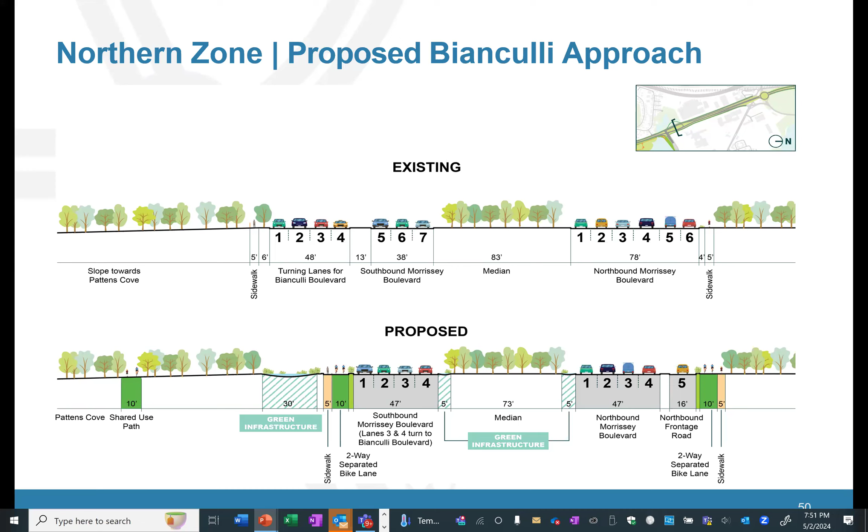We've got to deal with the reality of sea level rise and 100-year storm waves. The commission had a mandate to raise the road, and that's what's going on, that's what's illustrated, that's a very nice looking line there. But you mentioned it's a great view from on top of that berm and the roadway. The concept seems to be intended for people driving in there, and they're all coming from Morrissey Boulevard.

Probably less than half the people occupying the space here are actually driving in on the boulevard. Most of the users are people in the neighborhood, we walk in around the beach, around Dorchester Bay Basin, we drive into the common park and walk. If you raise the berm there, you're cutting us off visually from the harbor. I think it's a mistake to build a berm in that location, for two reasons. Number one, it's a visual thing. The berm could go all around the perimeter of Dorchester Bay Basin and create public space.

As we see there, that could all be pushed back. You could build a bridge as needed, but you could make Morrissey Boulevard in the central zone a viaduct high enough to accommodate sea level rise. Whatever we need to raise the roadway on Morrissey Boulevard doesn't have to be on solid ground, it could be a viaduct. We could dredge out all of that soil and improve the environmental condition in Dorchester Bay Basin. What's being neglected right now is that there's a highly contaminated, very deep sediment layer in there. In this picture, there are no people in the water.

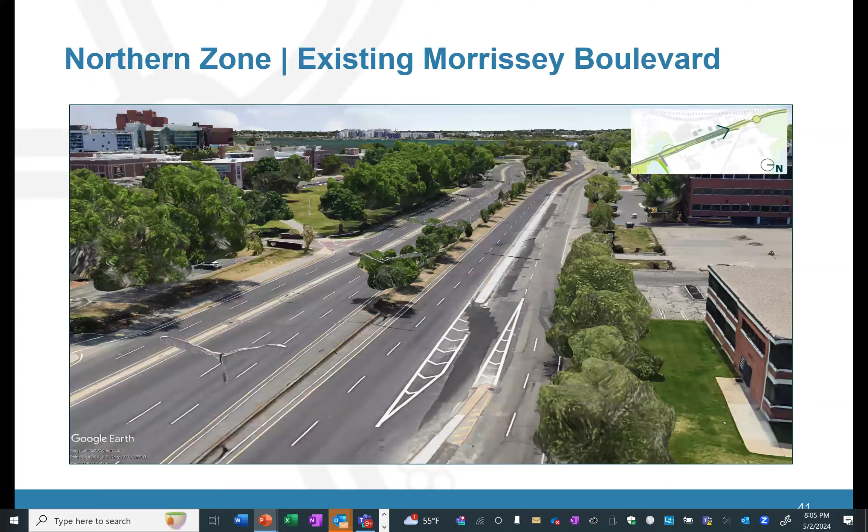Just want to say that. I cut in the line though. Somebody else is up.

No, all right, then I will wrap up. It's another aspect of this, living here forever and being 70 years old. People spoke at this, and I don't come up to many meetings, but in 2017 apparently we were on the path, but the path broke down.

Probably for the better, in the sense that we are now 7 years out from that and have that much more information. As John Rich puts it, we know the reason we're here is truly because of the environmental impact. I think the great thing about this meeting, as Jake puts it, is this is a unique opportunity for a number of players that normally aren't around, including myself, to work together to see that it really does happen this time, probably much better than it would have happened in 2017.

The last thing is I invite everybody to my funeral, because John Rich brought up that it is horrendously dangerous to swim inside the bay, which I do twice a day, around high tide, all through the summer. So when is it going to be, John? Next year or the year after that? You can plan. Sorry.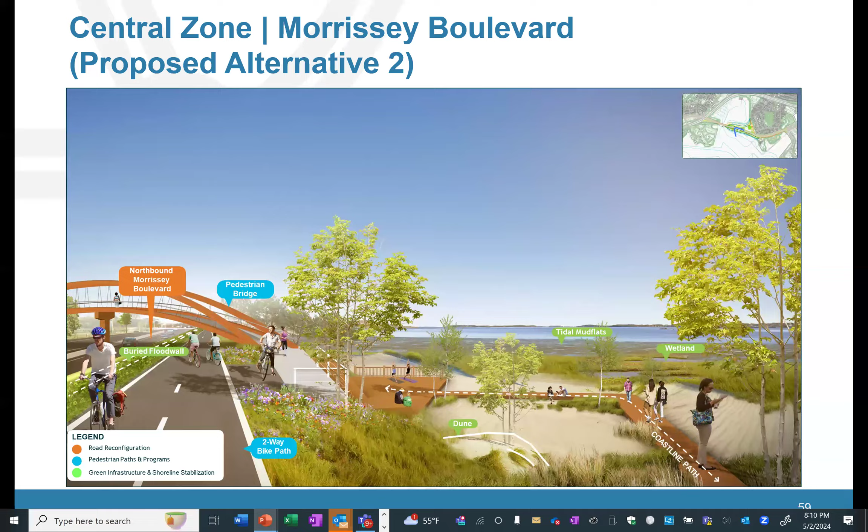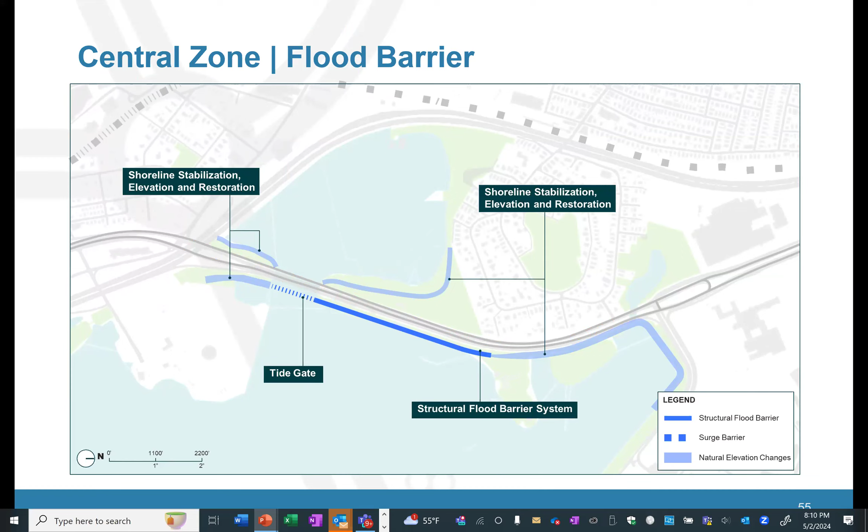I know these are renderings, but if you look in the top right, there's a black box that says shoreline stabilization, elevation, and restoration. And that's not actually the shoreline. So I would love for the renderings to be a little more accurate.

If you go back one more slide, to 54, it says in the bottom black box: Savin Hill Yacht Club access with natural elevation changes. I'm just curious what a natural elevation change means. I know that's not going to get answered today—I just wanted to bring both of those up for public record.

Lastly, as a resident, I think the plan—I love the bike lanes. I'll leave it at that. Someone mentioned something about families: there are dozens of kids in Savin Hill, including my own, who ride bikes every day all over the neighborhood, to the Harbor Walk, to Moakley Park, and to Southie. Bike lanes would really improve our quality of life and relieve the everyday pressure of worrying about your kids getting hit by a car. Appreciate the time, and everyone up here, and Ethan and everyone else working on this. Thanks a lot.

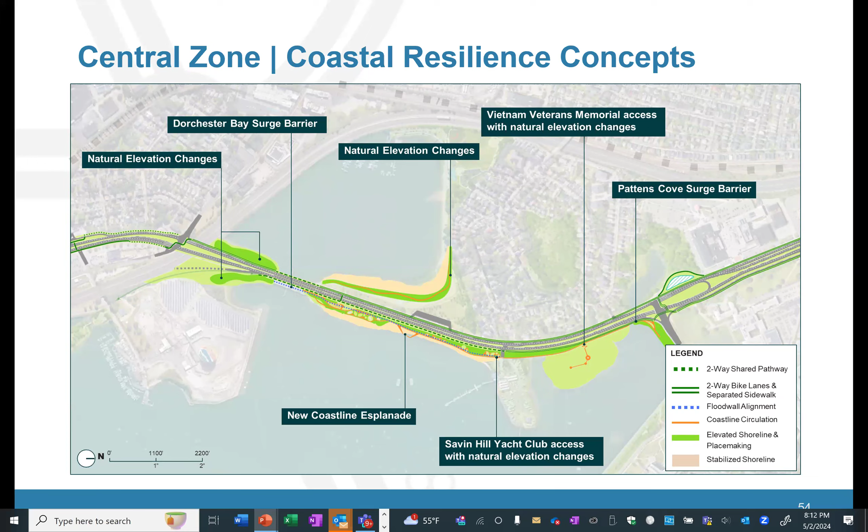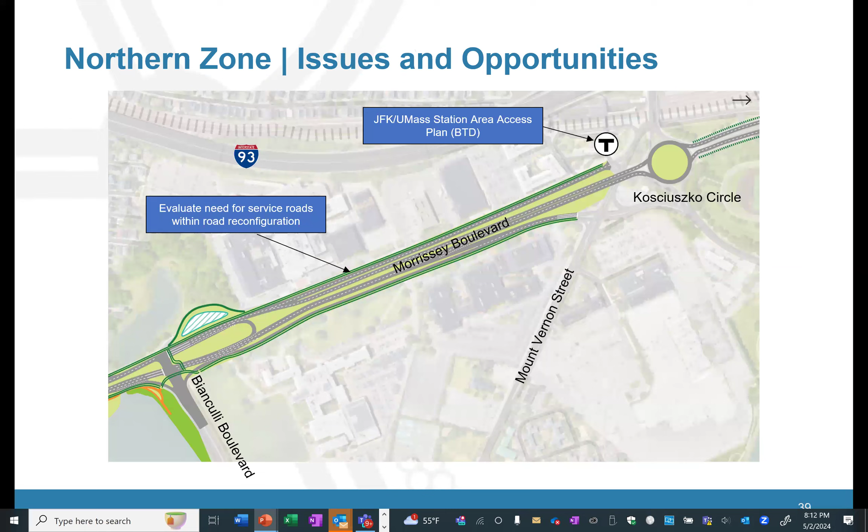The neighborhood that Columbia Savin Hill represents has a lot of industrial land that has become post-industrial land. It's about 20 acres in the area east of Dorchester Avenue going down towards the expressway, and that doesn't include Freeport Street and all the land there that's likely to be developed into housing over time. Anybody that looks at South Boston can see where Dorchester Avenue and Colony Boulevard come together, that's all being developed into housing and commercial purposes that used to be industrial and now is post-industrial and being redeveloped. Who would have predicted that Gillette would have 30 acres of housing and development over the next few years?

So overall, we looked at these things. There have been a number of planning efforts over the past 10 years, actually 10 different efforts at planning. So when this came up and we saw it in the legislation, the enabling legislation, here it goes. It says, develop a comprehensive plan for the Morrissey Boulevard corridor.

We saw it as a great opportunity to try to get, as the state and city are both involved, real comprehensive planning that's going to look at how this land gets developed all around the area, not just along Morrissey Boulevard, and not just the issue of flooding there. From our perspective, we see this as an opportunity, and we're really looking forward to the city and state working together to figure out how land gets developed over the next 10, 20 years, whatever, and how that's going to happen.

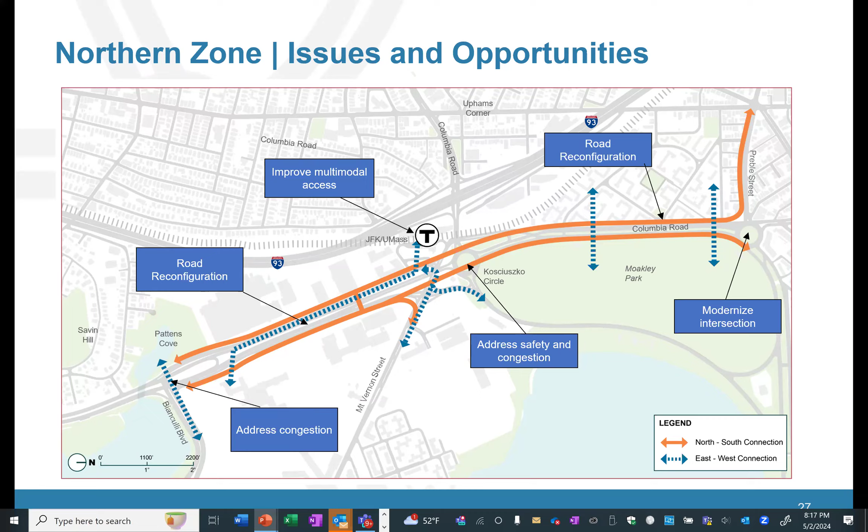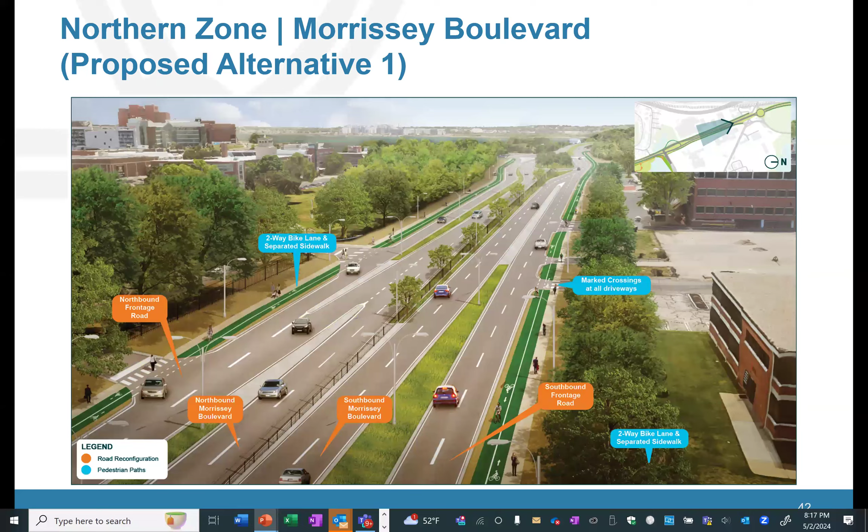But can we go back to that slide? It looks like there's almost 2 U-turns there, or 2 interruptions in the median. So there's a spot between the Veterans Memorial and Savin Hill where you make the final turn, and then it looks like the median narrows down by the yacht club. What is that? Are there 2 entrances or 2 U-turns?

This opens up into a double lane, allowing each to make that turn, and then there's still the signal at the outlet. So it's just a signal, not a turn. There's one at the yacht club, correct.

What was the decision to move that from the U-turn at the yacht club to closer to the neighborhood? Well, I think the benefit of that... our designers, if you see how much space that takes up, U-turns take a lot of space when you design them for trucks. So the way we laid this out the first time, we knew we had to lay it out for what we call a design vehicle.

I think as the design progresses and we talk more about this, we may be able to shift this, where we don't need quite this much space, if we as a community agree that maybe that one movement doesn't need to handle a WB-67 giant truck, which are not allowed anyway. So that's maybe the consideration. Buses, though, take kind of the same way.

So with the shift there, it moves traffic closer to homes and leaves more... I live right there. Okay, so there's already so much traffic and movement there, and by narrowing that median where there used to be trees and everything, it just seems like a huge concern.

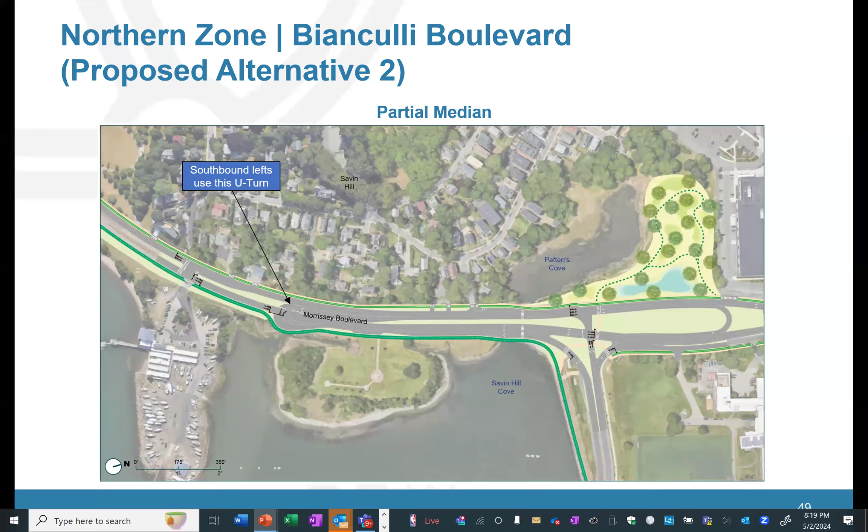But yeah, I think... can we move to the slide where it's by the 93 bridge with the U-turn? Yeah. Oh, no, the one we had. Yeah, so the median seems to be gone with all the trees and the grass between the two lanes going, I'm gonna call it north and south.

There's no median here today, this is the stretch right approaching the Beades Bridge. Yes, so there's... is the bridge right where the cutoff is? The bridge is basically right on it. Okay, so there's like kind of...

Typically 3 feet minimum, so it's elevated up, the bike lane is elevated up, there's a curb, and then a little buffer, and then the bike lane is up on its own facility, separated. And is it possible to plant trees or something there too? It is possible, but with this constrained cross section here there might not be space. Certainly once we get away from the Beades Bridge, there's probably a little bit more space to create something more significant and noticeable.

Just a comment from the previous group that was doing this project, one thing I did that was very helpful was they printed large slides of their presentation and put them around the board, where people could actually write comments and circle question areas, and people from the presentation were around to answer and address them. That's sort of an open house with some boards.

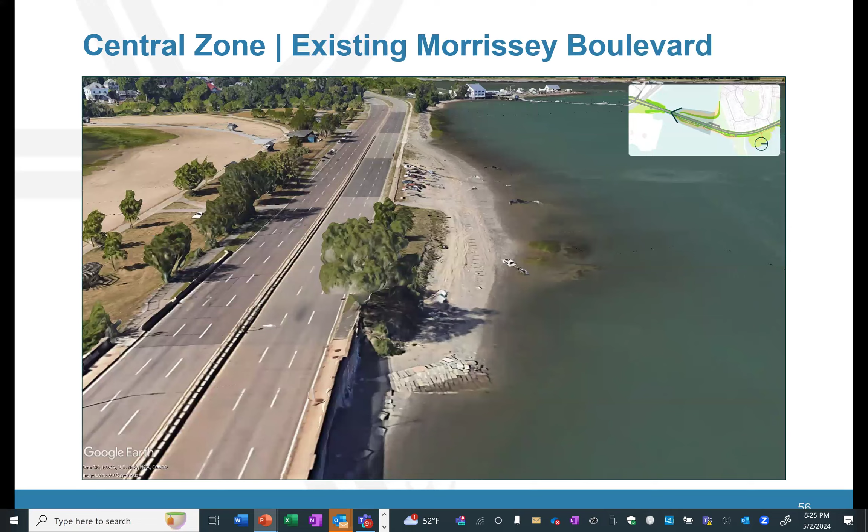So, thank you. Yep, the last thing is bikes are actually more of an economic mobility tool. They're a lot less expensive than cars, so bike infrastructure is a very important signal to how you care about your residents, your constituents, trying to work and get to work. So it is important that we invest in that. Thank you.

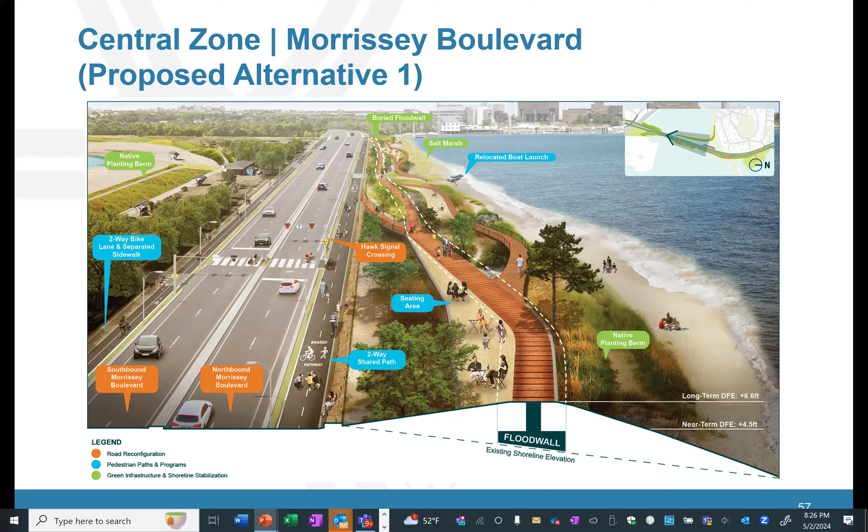I'd add one thing on the cross section - does it show the bike lanes are raised? You said they're raised on the rendering, but on the cross section, are they raised? It depends on which area. Yeah, so it'd be helpful to explain. Yeah, I should. But either way, not a big deal.